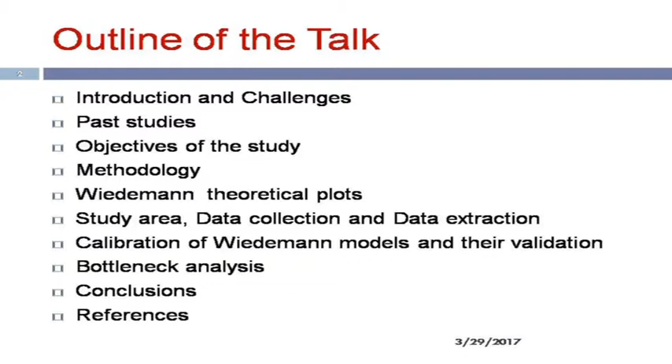There are enough challenges. Of course, simulation looks very good and it is a very handy tool, but definitely if there is garbage in, garbage out will be there. So we have to be utmost careful. We have to calibrate these parameters well, then only you can apply it in the field. So the challenge is always how to include this following theory or following behavior. Following theory is what?

How basically there is an effect when you are driving a car. Somebody beside you, laterally as well as longitudinally, is going to affect your performance, and your driving behavior is also going to affect somebody else's behavior. That is to and fro, or one to one, or, to be very precise, there is not only one single vehicle as a leader. There can be 3 vehicles in front of you, and there will be a little effect of all those vehicles on your behavior.

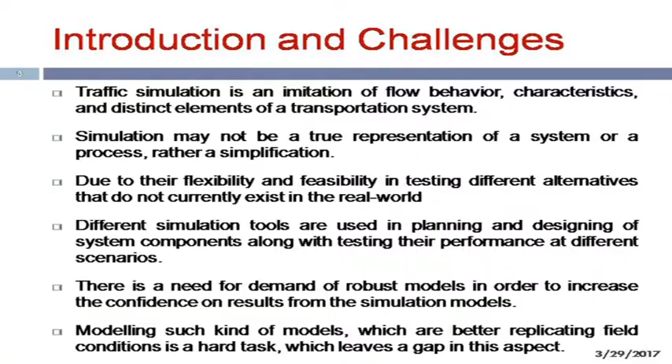So that is why it is really a little difficult, and there is a lot of challenge in replicating this particular condition using VISSIM under Indian conditions. And that is the reason we have tried to develop some approach. That is what I will be talking about. There are certain studies which have been carried out all over the world. Professor Ranjithkar is in Auckland University of New Zealand.

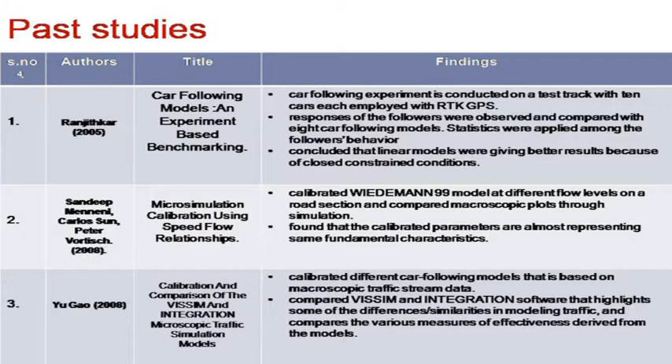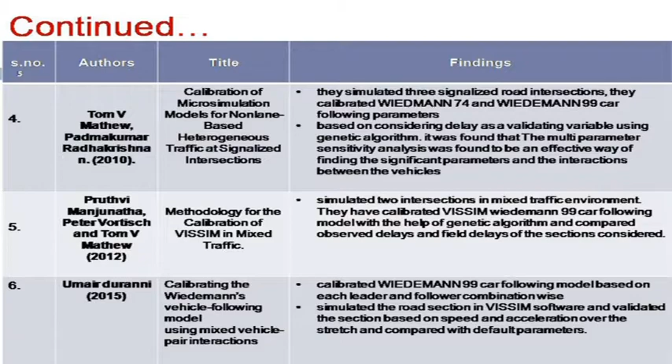Then Sandeep Menneni, and then Peter Vortisch. They have developed certain calibration procedures. Of course, I think Vortisch is from PTV only; he was with PTV. And then there are some other efforts from China. There are efforts from Professor Tom Mathew from IIT Bombay, and then we have also done some studies on this particular aspect. There is one more Peter Vortisch has done, and then so many items are there.

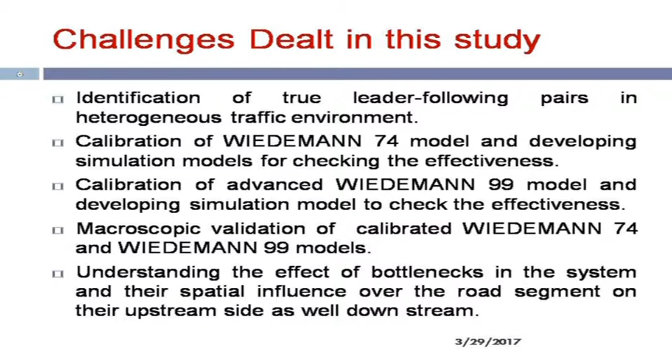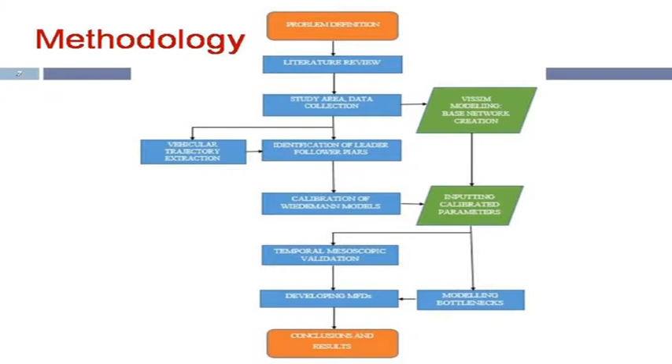But when it comes to Indian conditions, we don't have an exact methodology for how these parameters are arrived at. A methodology is there that is developed based on soft computing techniques, developed first by Professor Tom Mathew from IIT Bombay, where the parameters are taken from the PTV user manual, and then based on the type of parameter, there were some ranges given, minimum and maximum value, and then GA was applied. GA is basically genetic algorithm. Thereafter, through optimization, the value was fixed, and it was more of a soft computing approach.

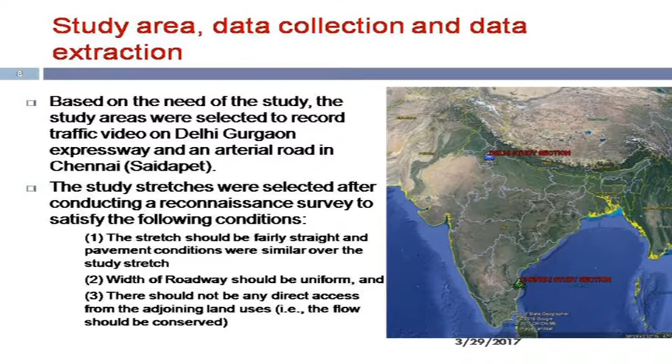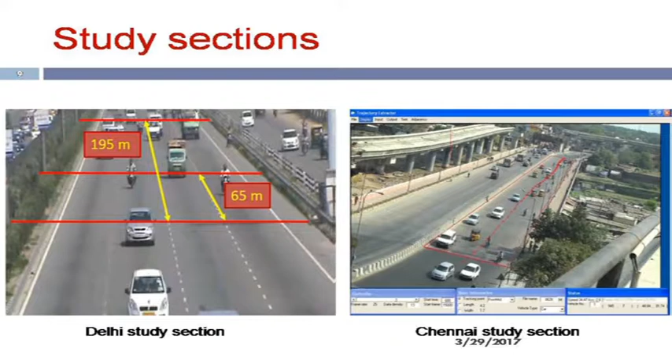But the challenge was there was no availability of actual field-based observed trajectory data, through which we can actually study the following behavior. So with that objective, motivation and challenge, we started this particular study, and that is what I am going to explain. So the challenge is what? Identification of true leader-follower pairs in a heterogeneous traffic environment. This is an extremely difficult task, still a challenge. Many people are working on this at present in IIT Madras, IIT Bombay, SVNIT Surat, and maybe other NITs also. So I hope that we should come up with a good methodology for this.

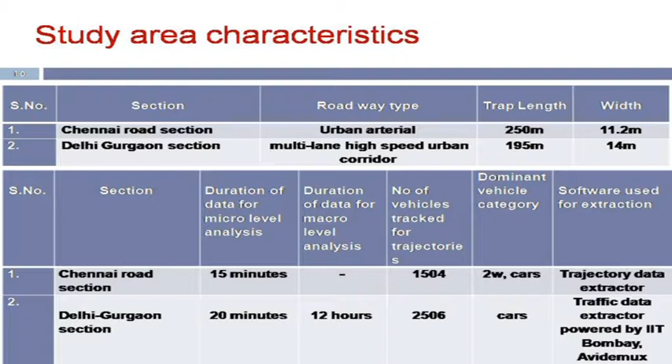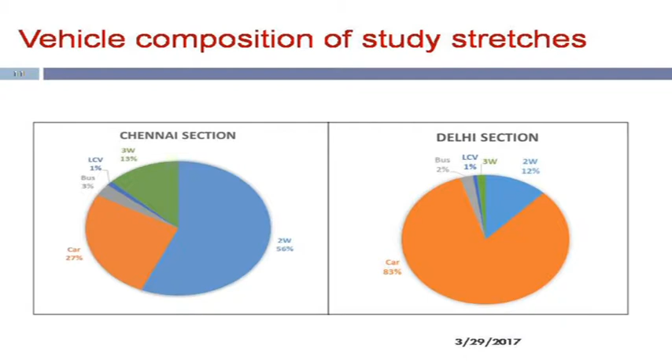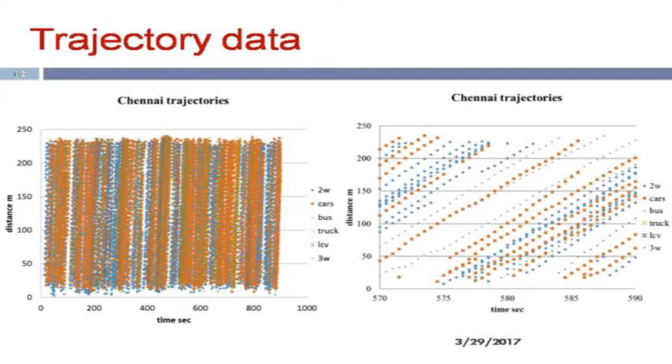Of course, we have calibrated Wiedemann 74, then we have calibrated Wiedemann 99, different parameters. Here there are 3 parameters, here there are some 9 parameters, out of which we have calibrated 7, and 2 we have assumed as default. Then we have done microscopic validation. Of course, microscopic validation is very, very difficult. Under Indian conditions, it will be extremely difficult to validate based on microscopic observations. So at present, we are restricting our study to macroscopic validation. Once we have done all these things, we have simulated the bottleneck and tried to see the effect and utilization of infrastructure and its effectiveness. This is the methodology, which I have just discussed.

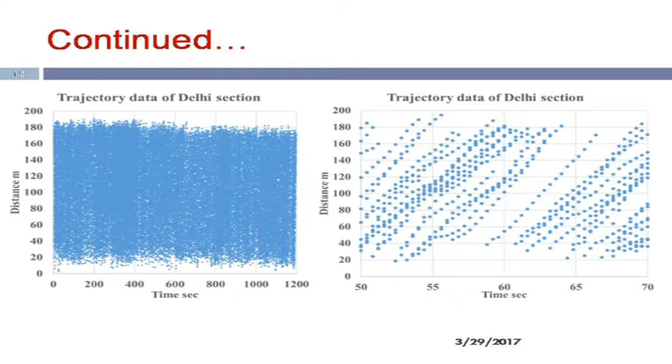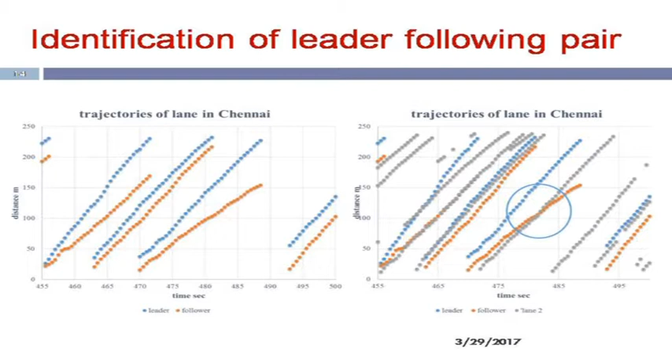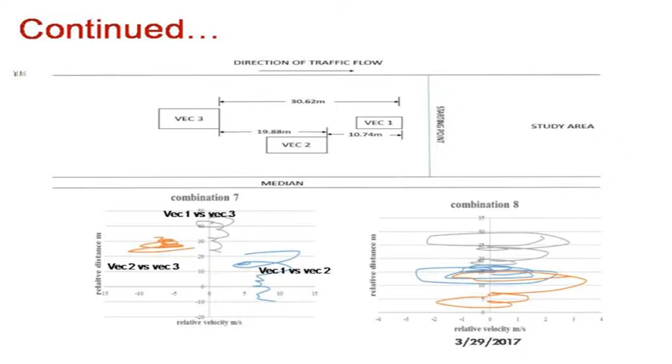These are the locations. One location is Delhi-Gurgaon Expressway and another is in Chennai. You can ask us the question: you are in Surat, how come you are having this particular data? Naturally, because my earlier place of work was near Delhi, I have a lot of traffic data, video data. From that, I got some trajectories. And in Chennai also, we got some friends through whom we got some video data, and then we have tried to use that trajectory data. And also, it is available open source. We can share those details with you; this trajectory data is available open source. Anybody can access it, anybody can use it.

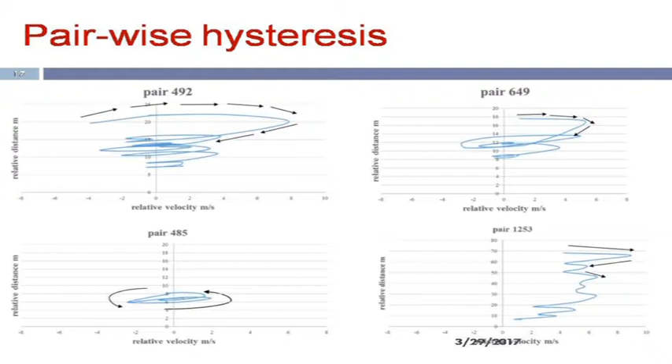First of all, before we do any more discussion, I think it is very important that whatever data we have, we should share all over India. Because if you don't share that data, then it is really a defeat of research. That is what is not happening. So first of all we should start sharing databases. So after this presentation, those who want data can take data from us.

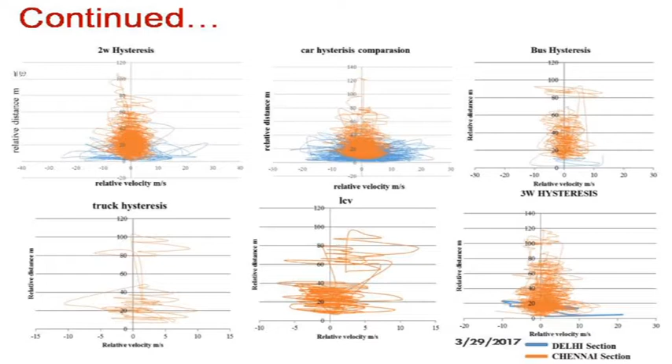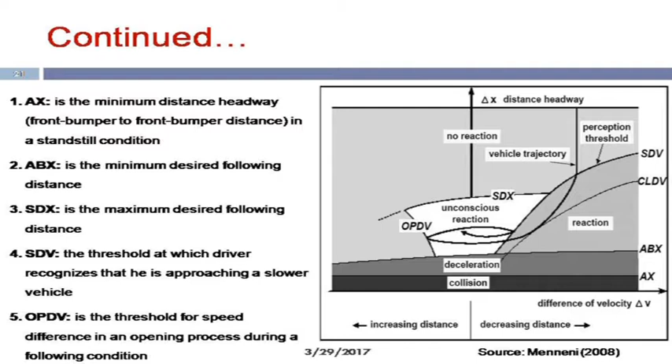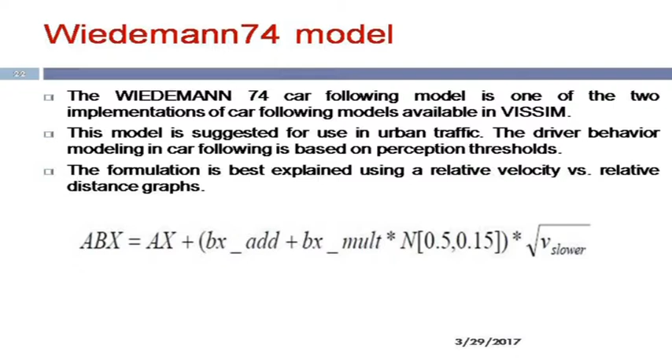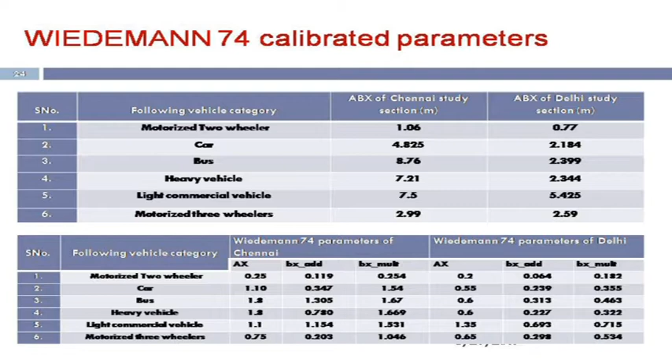So for this kind of study, it is extremely important that we have a very good vantage point, without which we cannot get anything. We don't have any kind of automation or instrumentation on our roads. And even if it is there, it is not going to work well for our conditions, as you know. So it is the most important step that we should have this vantage point from where we can get this, and then we can develop trajectory data.

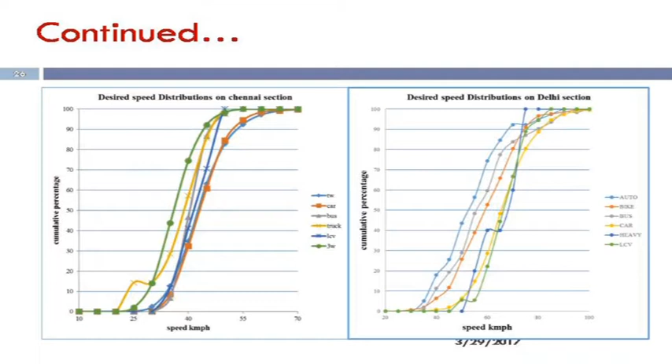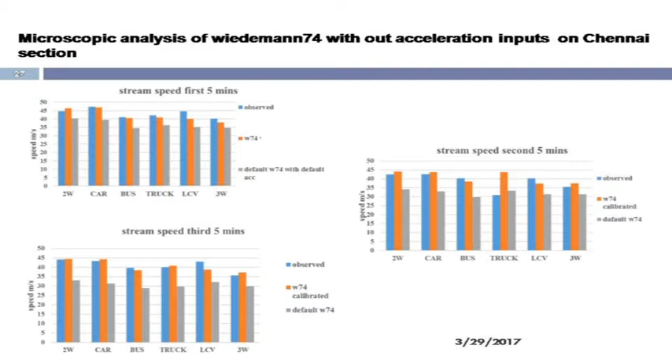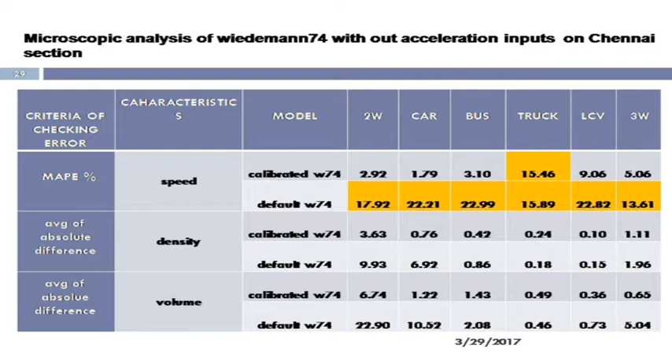Okay, I hope everybody agrees with me. Even sir is there from RITES. So I must acknowledge his presence.

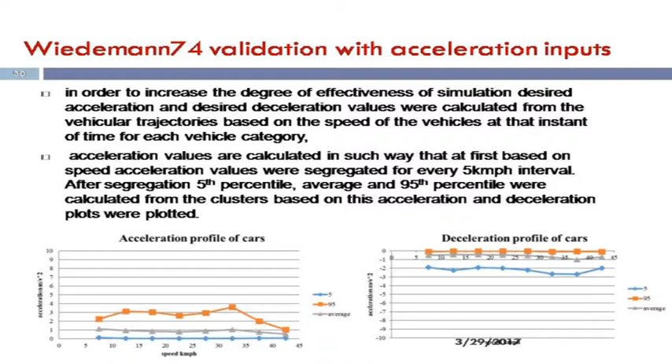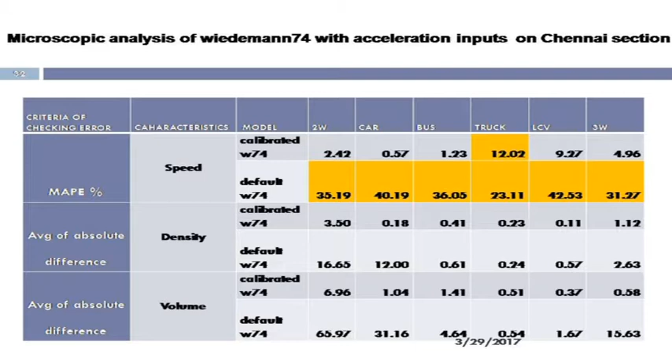Delhi-Gurgaon Expressway definitely is a multi-lane urban road. It is not exactly an expressway because there are partial entry-exit points, and the behavior is not exactly like an expressway. Okay, so this is the motivation which we carried, and then we took these 2 roads for our study. We have developed trajectory data for 15 minutes, and of course more data is available. We have used 15 minutes data only, and for the Delhi-Gurgaon section we have 20 minutes trajectory data.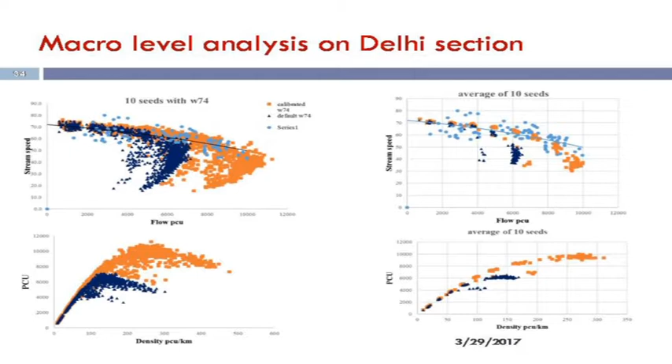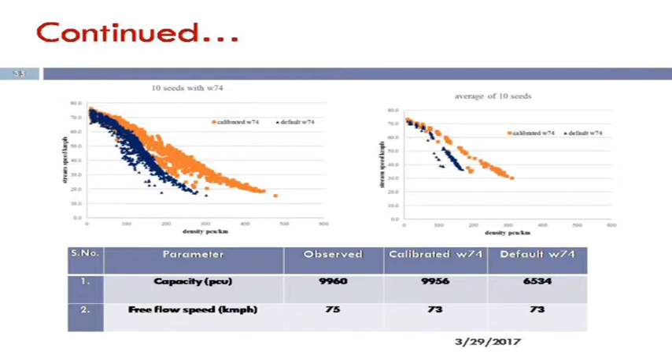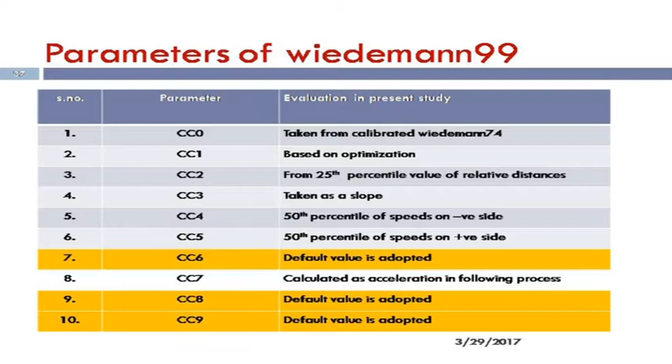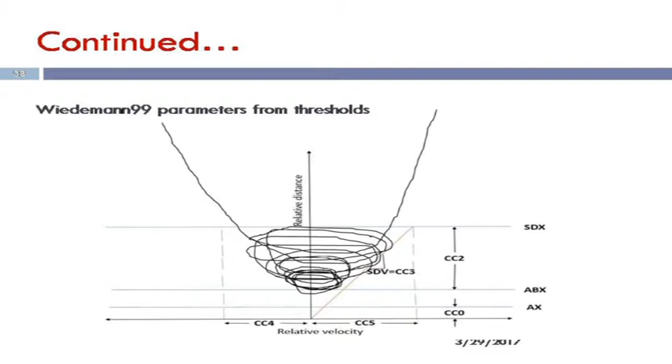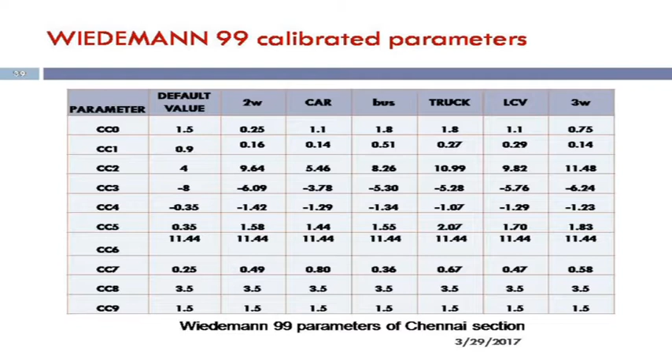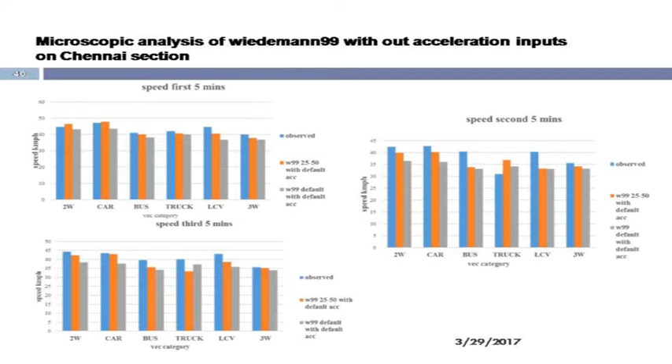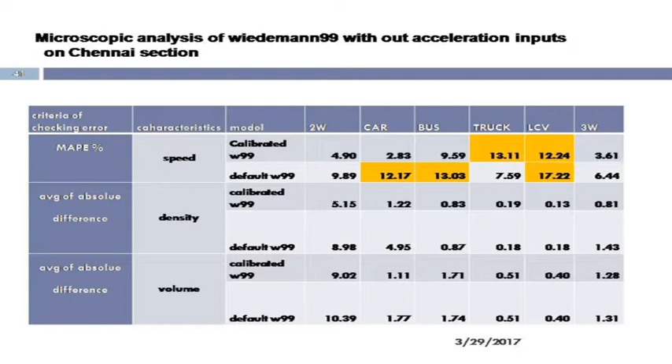So this is the challenge: how to identify exact leading and following behavior, or the leading pair, because there are 4 or 5 vehicles together. So what makes it that which vehicle is the leader and which vehicle is literally a follower?

So for that purpose, as I told you, we have categorized into lane-wise, and then over that, those which were just on the lateral part, partly on one lane and partly on another lane, those trajectories were overlapped over these trajectories, and we tried to find that there are a lot of possibilities: it may be a two-wheeler, it may be a car, it may be any vehicle category. So because of the presence and size of that vehicle also, of course, it is going to vary the behavior. So this was dealt with.

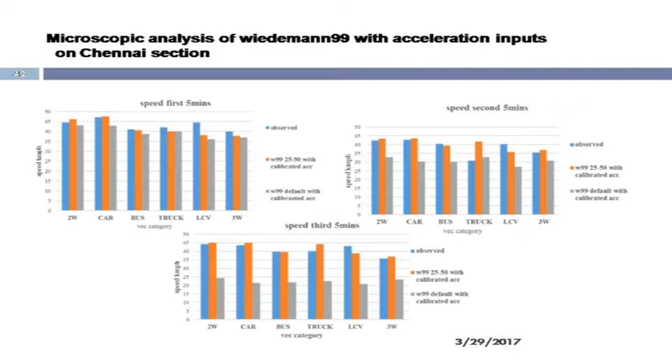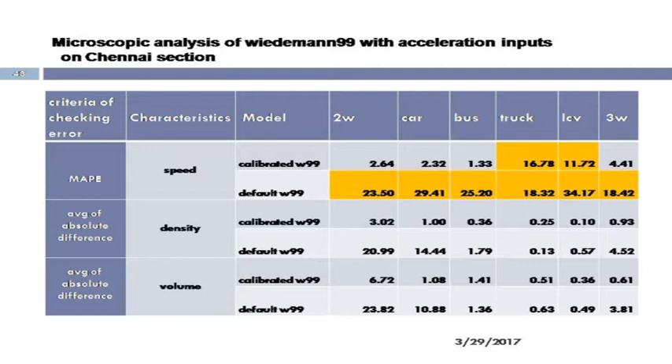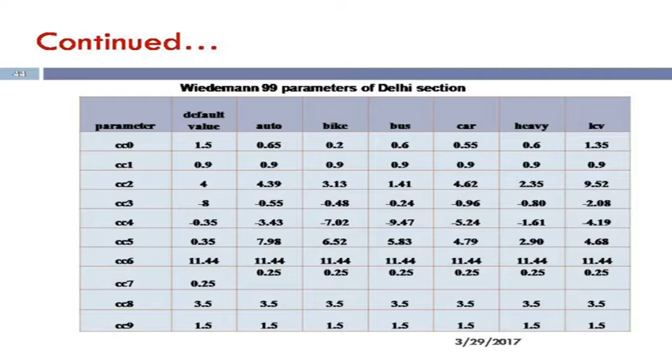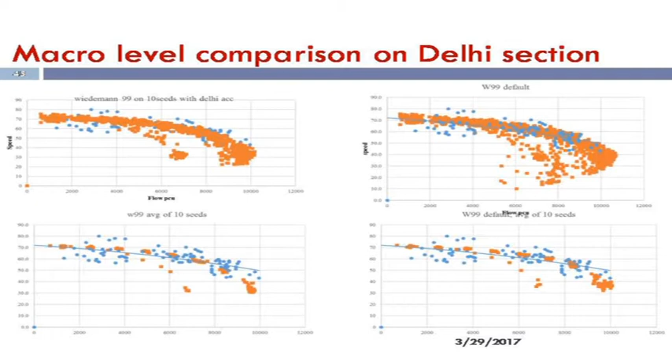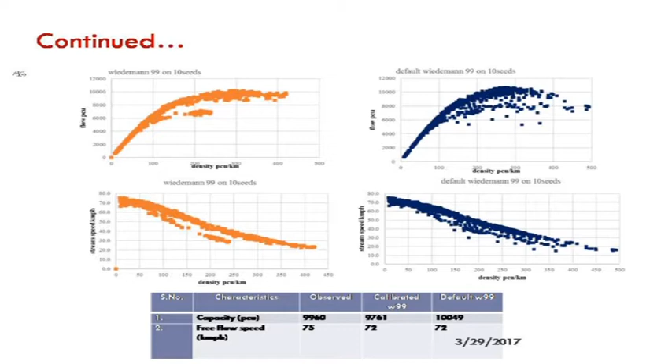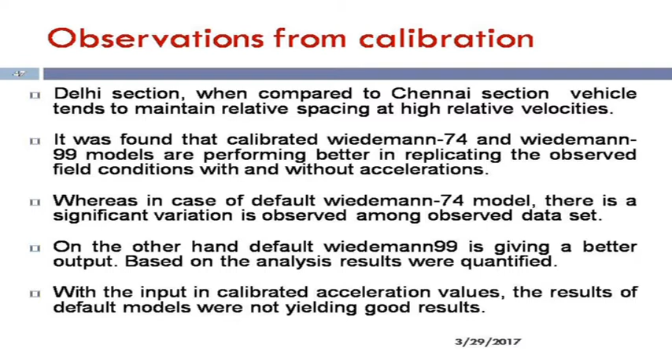This is near capacity and this is at moderate flow levels. So our recommendation is, let us try to pull together at the same V by C ratios across different cities, see how they are performing, and come up with a better model or better calibrated values for calibration of this particular vehicle following behavior.

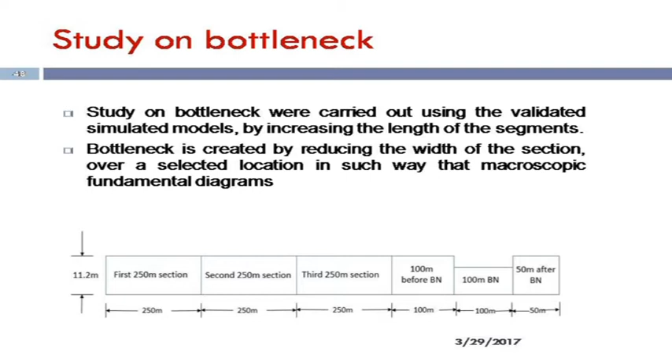Then we thought, let us also try to get acceleration values from field trajectory data, and thereafter we'll see whether we can have the same accuracy level or not. So we calibrated this and got acceleration values also from video data. For that also we have separately developed a methodology, but I don't have time here to explain that.

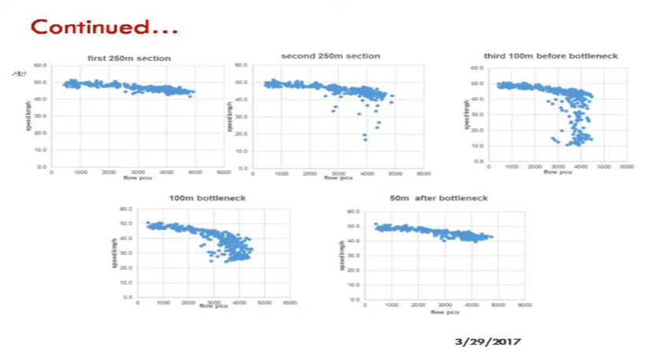So this is how we have validated this particular model or theory of calibration of 74 as well as 99. You can go into that. Similarly, we also worked on the Delhi section along the same lines.

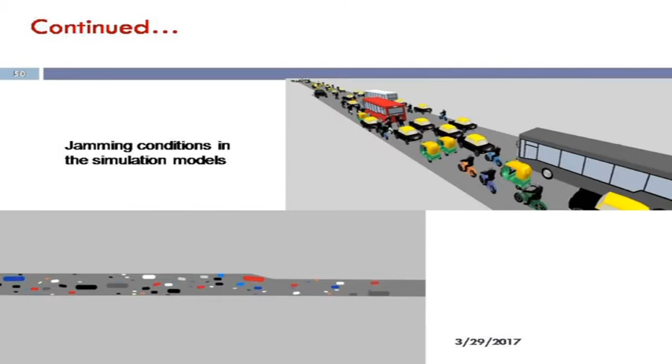Similarly, we have developed the 99 model. Again, I will not explain all parameters, but there is a procedure for that too. What we try to do is we have calibrated all other parameters in similar fashion based on trajectory data, except CC6, CC8, CC9.

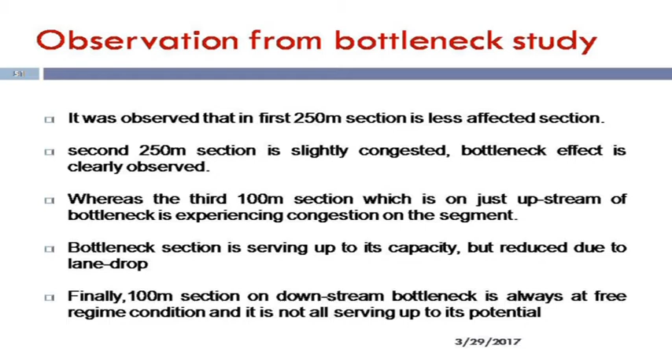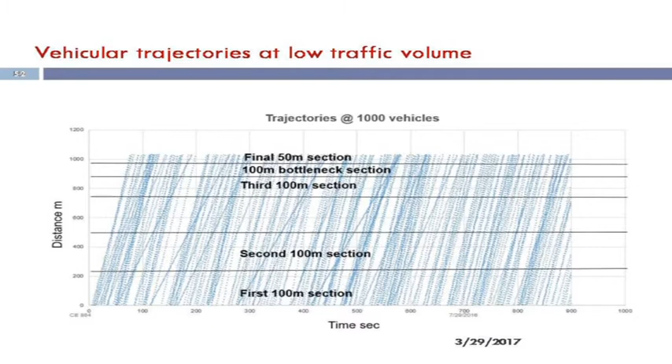These are the plots we have also generated. Other than speed-flow, there are also speed-density and flow-density plots. Observations from calibration show that we can calibrate the 74 and 99 models well, and calibrated values with actual field data more and more will replicate the real situation in simulation.

Finally, we developed some application. We created one bottleneck of 100 meters in length with one lane drop, and tried to see its effect based on the validated, calibrated simulation model. This is the design of experiment, something like this. This is the actual 100 meter bottleneck, and we can even vary it in VISSIM, as you know.

This is immediately downstream of the bottleneck, and this is upstream of the bottleneck. So we developed speed-flow plots for this to see the impact of the bottleneck. Similar logic can also be used for simulating work zones or any other incident. So this is the output.

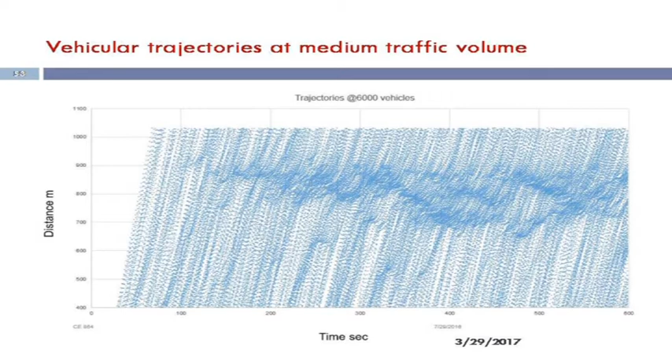You can see that for the first 250 meters there is not much change, then it slightly drops down. The bottleneck effect is seen—at a particular point there is a bottleneck, and because of it there is a sudden capacity drop since it is not being effectively used. During the bottleneck there is a capacity drop because this is almost near 5,000 and this is just below 5,000. So the capacity drop is something like 700 to 800 PCUs per hour.

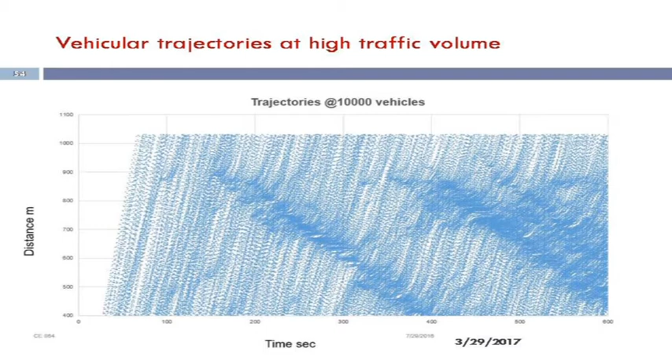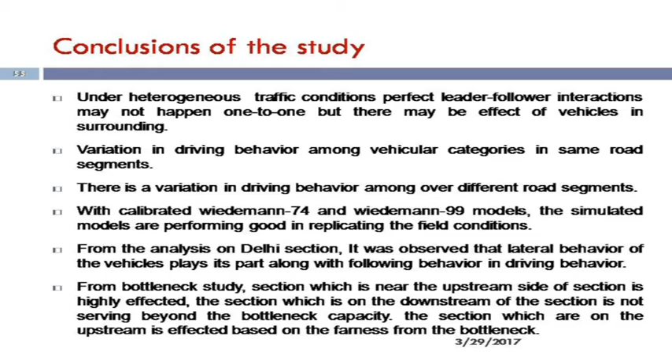This one is just downstream, and we can see this never reaches capacity. That means this particular section, just downstream of the bottleneck, is never effectively utilized because vehicles take so much time and it is never filled, since this is a one-lane drop. So the efficiency of this section will always be affected, and because of that the infrastructure will not be used properly.

This is the jamming condition we tried to create through the bottleneck situation. You can see the bottleneck created, and this is the jamming condition, because of which we got some points in the congested region also. So these are the plots we developed based on simulation output.